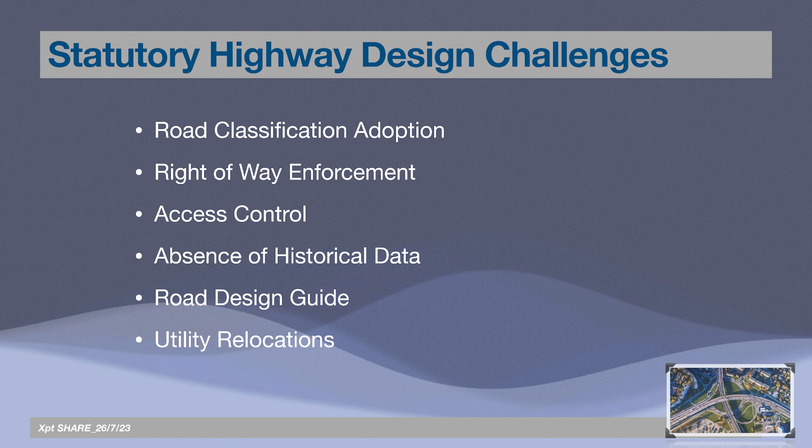Now, the next thing will have to do with how services for design are engaged. Traditionally, or for a long time, it's always been road agency initiated. The designs are undertaken in-house, either in-house or by consultants. Designs are reviewed at various stages from inception through to detailed design, and the contractor then procured based on those designs.

And then the works are executed and supervised by either consultants again or the agencies themselves. Now, these are my challenges regarding the way it's being handled today.

I don't believe we give sufficient time allocated to the assignment, and therefore you either don't do a sufficiently detailed job, or you make compromises on meeting the timelines assigned to it. And more often than not, the design review processes extend well beyond the time allocated for the assignment.

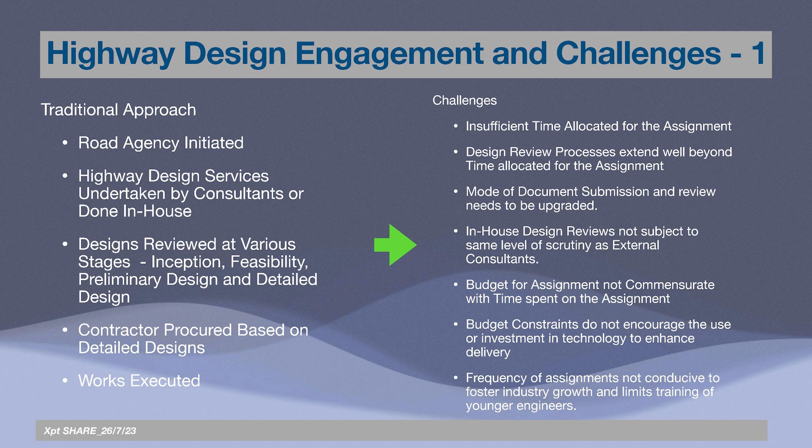Your happy consultant will obviously put in his best to give you the desired solutions we want. More recently, because of our limitations with donor agencies, we are resorting to unsolicited proposals where private agencies look for money, make proposals to government, government accepts, and then you proceed to execute the works. For the contractors, it's an assured way of making money. So a lot of them who can arrange for finance approach these things, but it also has its challenges for us in the local industry.

Up to that time, when the contracts are signed or any formal arrangement is made, the proponent is not obliged to use anybody locally. A lot of times you find them bringing their own expertise to do the work here, and even if local expertise is used, it is very limited.

And then also, because of the absence of data, these guys have to pay for a lot of studies. You can imagine what it will cost to do significant studies for the Accra-Kumasi Road if you have to pre-finance these things. So at the end of the day, the data is collected not as thorough as it should be, and we base our contracts on estimates that have been padded for things that they may not see.

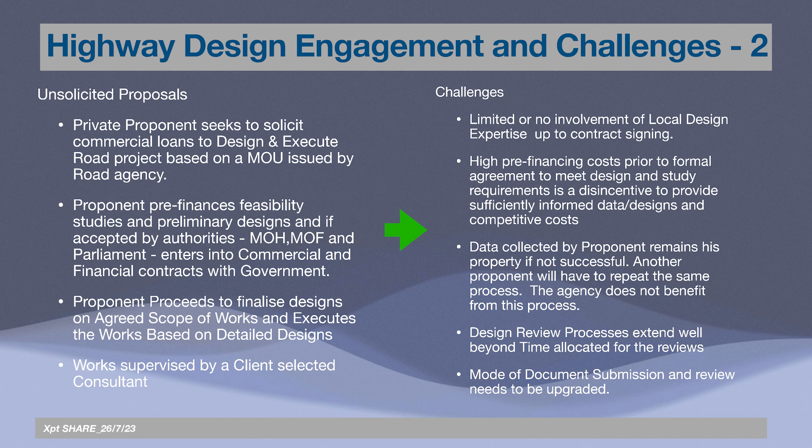Now I want to focus on technology, and discuss briefly on technology that we can harness. There's a host of technology that can be harnessed, but I think one important group of data is geospatial data. This data, because of improvements in digitalization and internet access, is widely available and can be used largely throughout the process of our design, from design through to construction.

Obviously this then makes the agencies take early decisions. They can plan. And if they plan properly, obviously they can create more projects and keep the industry going.

But it's very key that we, the agencies, look seriously into how much we incorporate geospatial data in whatever we're doing - all the way from pre-policy development, design, collaboration, consensus building, through visualizations. We can use geospatial data. So I'm going to be focusing on this kind of data in the discussion. Like I mentioned, there are other technologies in the traffic sector, but the impact for geospatial is very wide, and I think it's worth mentioning, and that is what I'll focus on.

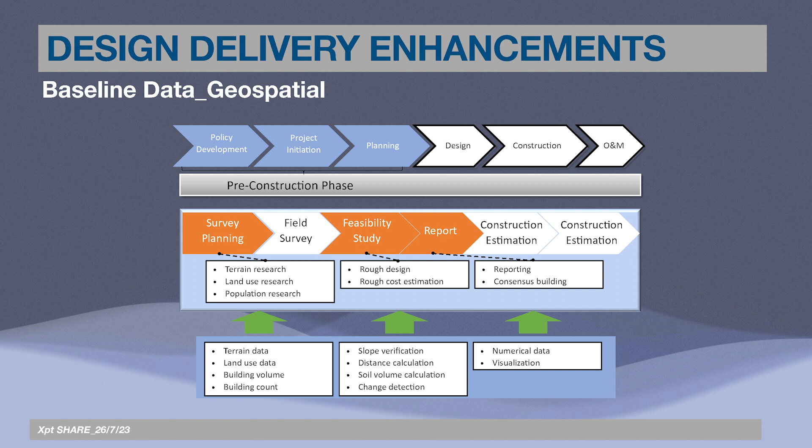So, like I mentioned, technology has improved, and there are various methods for acquiring this geodata. We have drones today, both manned and unmanned. We have mobile mapping. We have satellite imagery from both free sources and paid sources. But we also need to know what their limitations are.

For the first, the smaller scaled ones, the sites need to be accessible. We have limitations, flight zone limitations, and then you should know that there can be inconsistencies with the data that you get. And the data sources are not always updated as often as they should be.

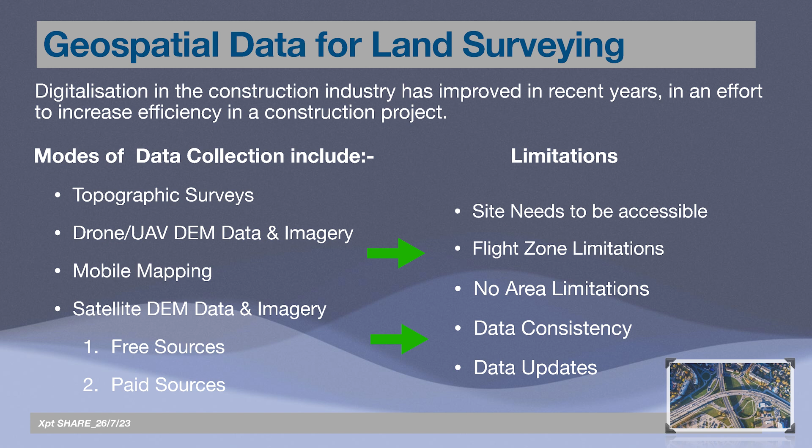Now, the other aspect where we can use geodata is for our baseline inventory and condition assessments. There's mobile mapping, where remote sensors are put on vehicles - the vehicles, in some cases, can go up to 80 kilometers per hour. At the end of the day, we can quickly generate our strip plans, identify assets within the right of way and beyond. We can assess the riding quality of the pavement.

We can also assess the existing traffic characteristics and capacity - do speed flow density analysis, road safety audits, and identify facilities for commercial vehicles. At the end of the day, this all goes to help with the planning. Early involvement of the data helps the agencies plan. Design engineers also use this to develop concept drawings and all of that.

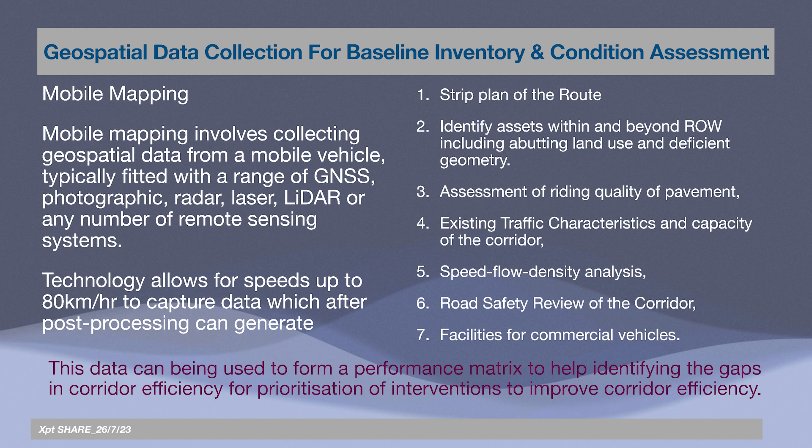I will go next into the design tools for design. Now that you've got your geospatial data available, the tools we need to use, there are a lot of softwares available for us to use. Common ones are Civil 3D on the Autodesk platform. You have InRoads from Bentley, you have MOSS, and a host of others. And there are other CAD platforms such as BricsCAD emerging that can also be used for that.

All of these software allow you to utilize this geospatial data, but we must know that there are limitations. The accuracy of data we get from Google Earth is limited. It's of a very low resolution. There are other paid sources where you can get slightly denser information, and the most preferred one is LiDAR data.

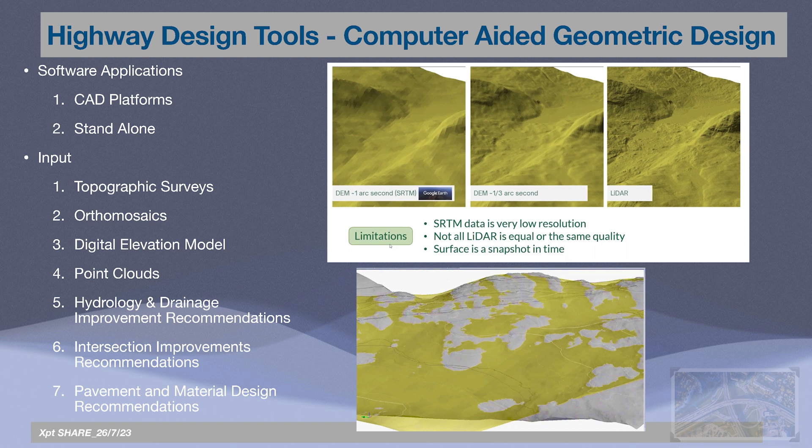Now, all of these technologies provide us with several amounts of data and drawings, and like I mentioned earlier, reviewing all of these things efficiently is a big challenge. My suggestion here is that the agencies start adopting some electronic document management systems where you can review and collaborate with various stakeholders consistently.

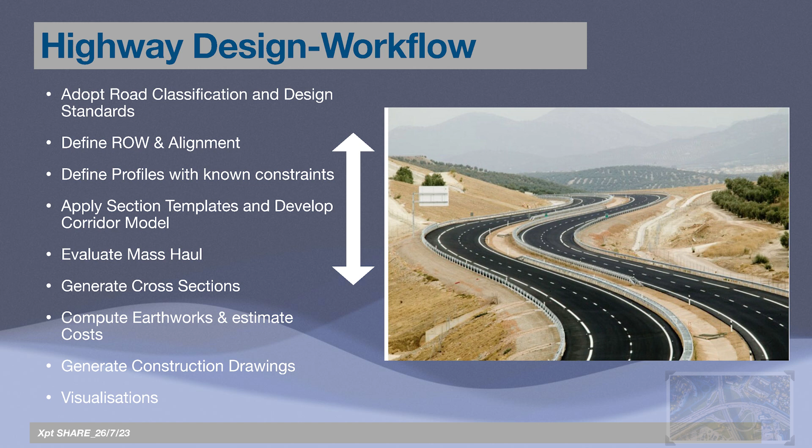I have experiences where we agree on decisions early on, and later on in the process, someone who has now come on board makes changes and wants changes. So the agencies need to drive it, and the agencies need to compel us in the private sector to use the technology.

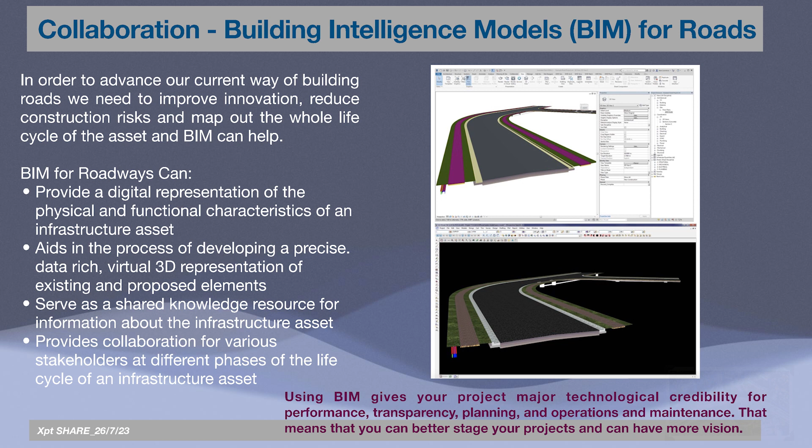Now, in summary, we need to improve and become more proactive. We need to enhance the process. We have an LI 2411, which tries to get a lot of feasibilities and concept projects developed prior to being executed. Let's try and find a budget to be able to do this. We will keep the local industry busy. We might even compel foreign companies to utilize our services more often.

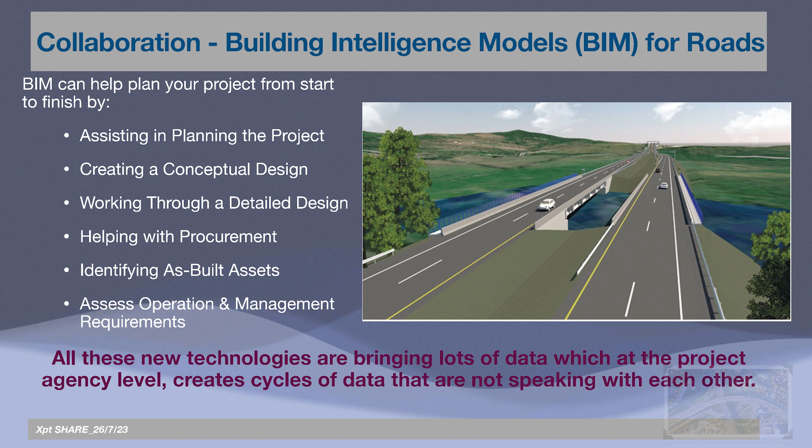And we should take advantage of emerging technology, be it geospatial, be it traffic, be it water, hydrology related. And then we should also go on to enforce regulations to protect the right of way, access control, and plan our projects properly. On the Kumasi Road, we are creating bypasses on previous bypasses. We can't continue to do this. We have to think through the processes from the agency level.

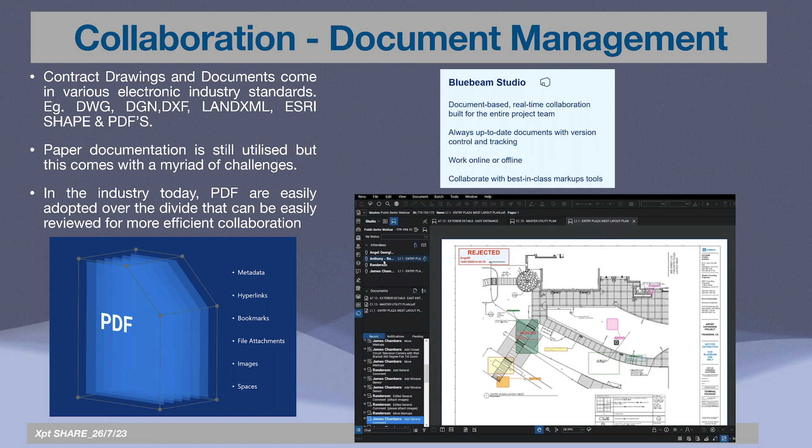Then, like I mentioned, we need to improve feedback and collaboration within the industry and hold engineers more accountable. If we need to insist on professional indemnity, we need to do that. But we won't grow the industry if we ourselves are not being held accountable.

Finally, we need to create other services related to design. For example, traffic data collection and monitoring can be privatized. The geospatial data collection service can be privatized. Road inventory data can be privatized. Document management can be privatized, all because of emerging technologies. If the industry grows, individuals and private firms find it worthwhile investing in these things, and we can train more engineers into the design sector.